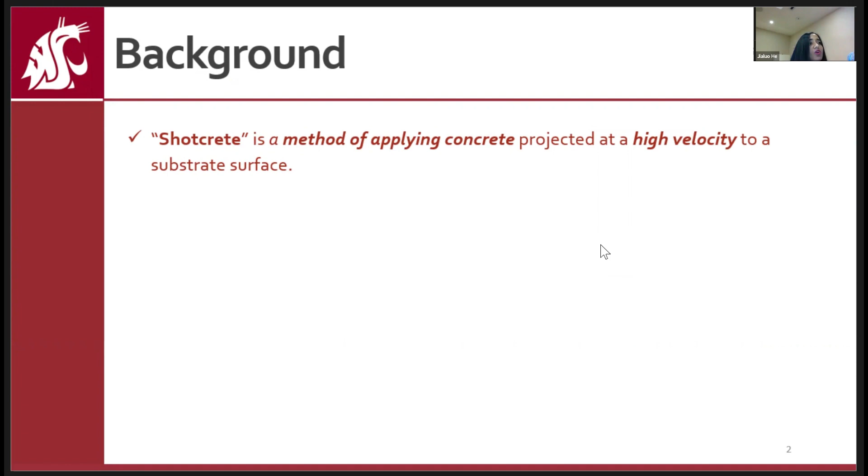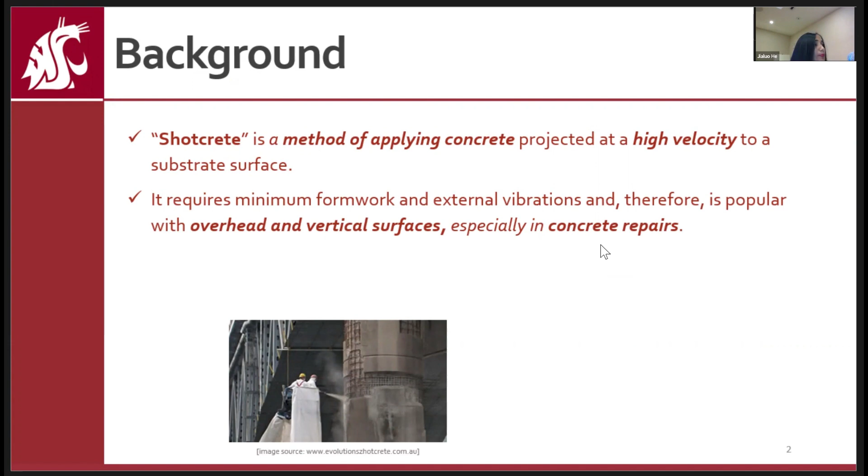So let's start. Shotcrete is nothing but concrete sprayed at a very high velocity. Due to the high impact force at the point of application, shotcrete sort of compacts itself, so it does not need any external vibrations or much formwork. Therefore, shotcrete is very popular for overhead and vertical concrete repairs, as you can see in the figure. But we now have a concrete substrate which is already hardened, and we place a fresh shotcrete layer on top of that. So there's a material mismatch between the two layers, and therefore the interface between the shotcrete and concrete is usually very weak and susceptible to damage.

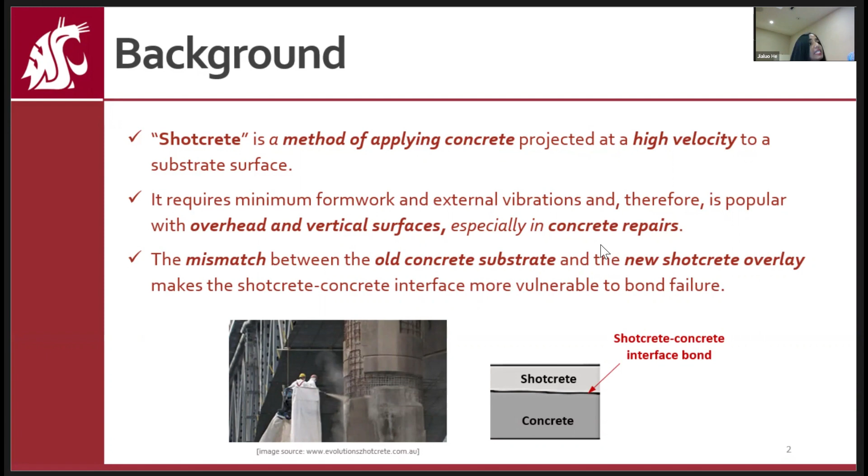So this project was focused on this interface bond. Also, there is another problem. Usually, these interface bonds are predominantly susceptible to shear type forces, but the most common test method for evaluation is based on tension loads. So that is one of the problems.

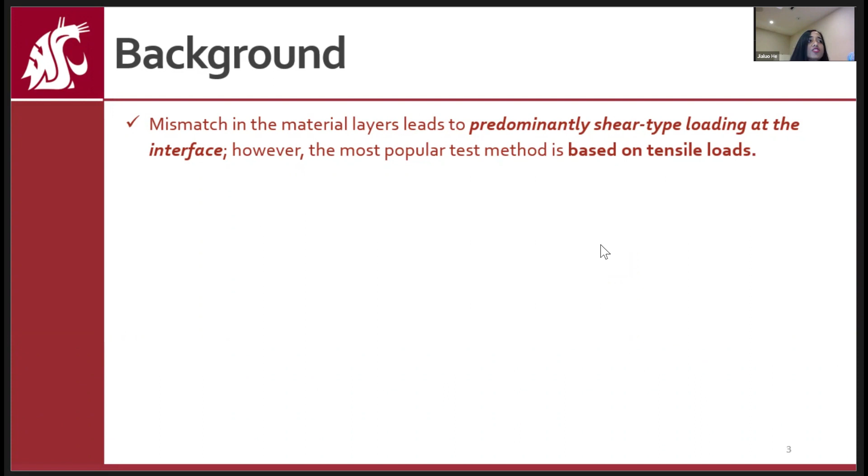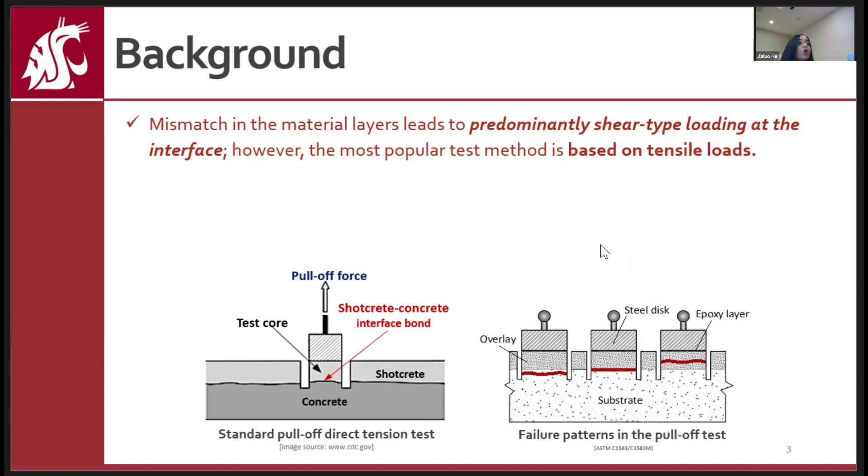The most common test method is the pull-off tension test. You have the concrete substrate, and then you have the shotcrete overlay. You drill down to the concrete substrate, and then you try to pull it off. So depending on whether the concrete to shotcrete bond is weak or strong, the failure could happen at any point - at the substrate, at the overlay, or even at the bond. So every time you measure the bond strength, you may or may not actually be measuring the bond strength. That is one of the problems with this test.

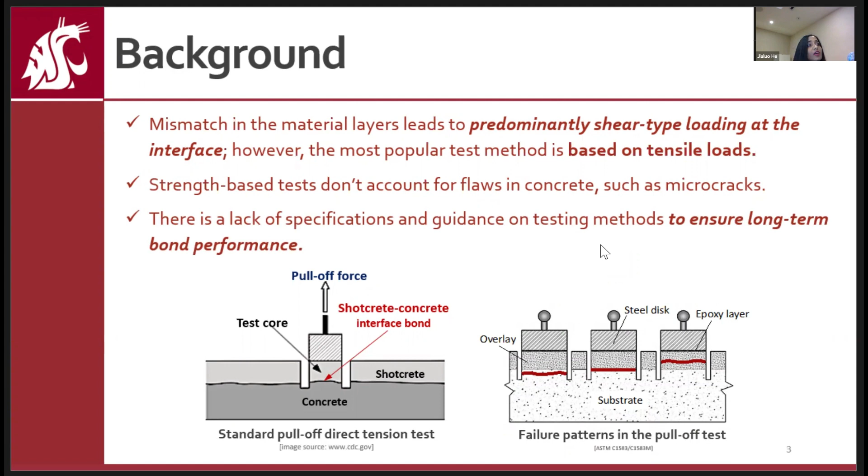Also, concrete and shotcrete are quasi-brittle materials, they have inherent flaws like microcracks, voids, etc. Those are not taken into consideration when it comes to strength-based tests, which may lead to premature failure. Furthermore, there is no standard method that takes into consideration short-term test results and predicts the service life of a structure. So that is also another problem we are trying to answer here.

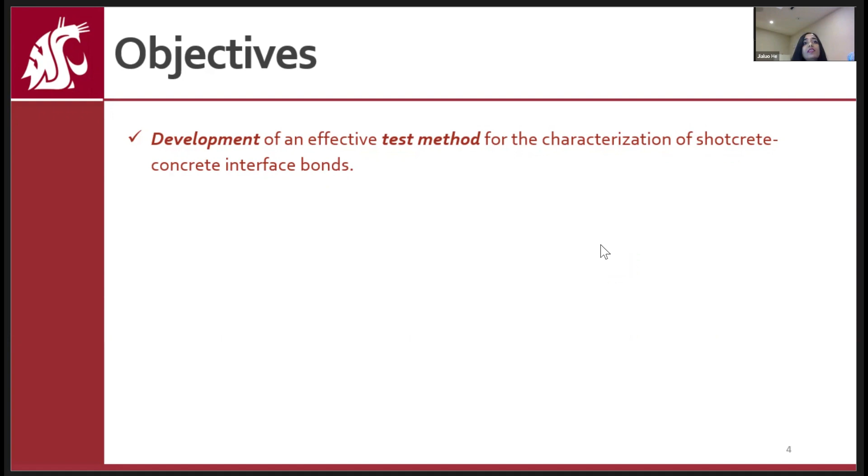So the objectives of this study, considering all these areas: first we were trying to come up with a new, more effective test method. To be precise, we came up with a fracture-based test method that considers already existing flaws in these type of composite structures. The second objective was to use this fracture-based test method to characterize the concrete-to-shotcrete interface bond. And finally, to predict its service life based on the test results.

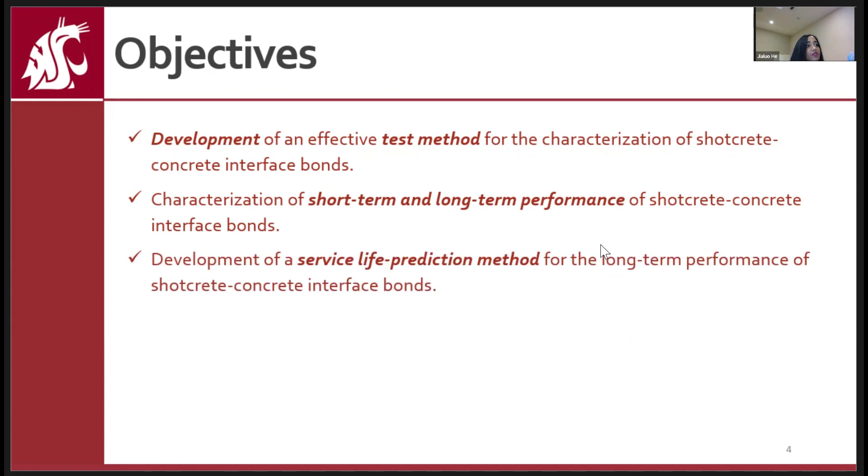So first, to develop this test method - one of the problems with the conventional pull-off test is it has a uniform cross-sectional area. It's a cylinder, so when you pull that off, it can break from anywhere. But when you have the interface area narrower, it's more likely to fail from there. So we picked something like a double wedge specimen where we tried to optimize the wedge angle to give the highest ratio of mode 2 fracture energy to total fracture energy. That was our basic concept when designing this.

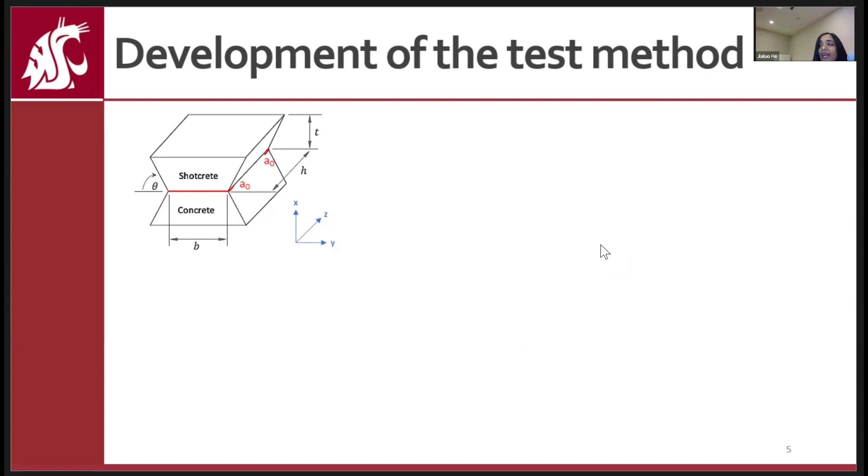This was a very compact specimen. If you have seen fracture-based tests, they're usually larger specimens, so we tried to come up with a compact specimen. Initially, we introduced two cracks as a notch. We did a finite element analysis to optimize this angle, and finally we found that the 45-degree angle was the best one. So we designed it in that way.

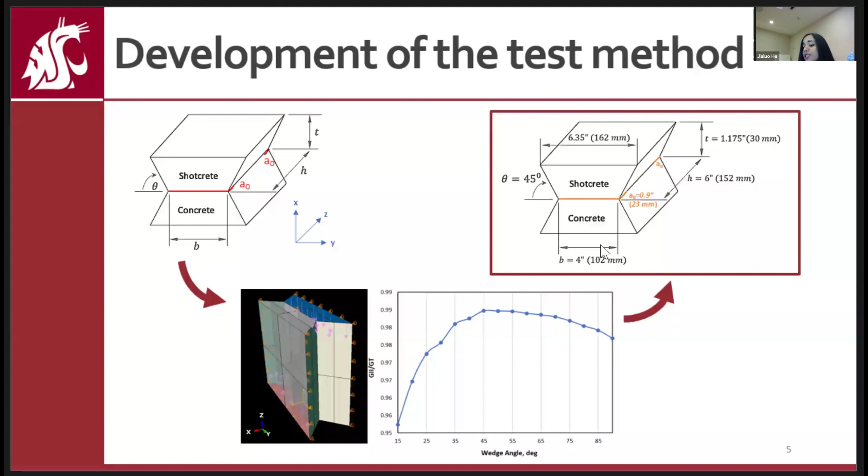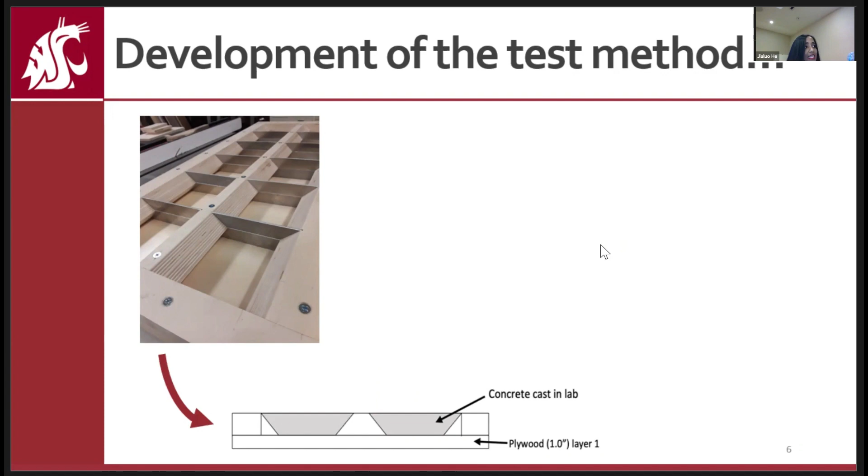Once the specimen was designed, our target was to design the mold. This mold, if you can see, has a panel of 12 specimens, so you can cast it at one go without casting specimens separately. First we cast the concrete layer at the bottom in the lab, and then we took it to a site where an ACI certified nozzleman did the shotcrete layer, because the quality of shotcreting depends on the skill of the nozzleman. That's why we took it to the industry and got it done.

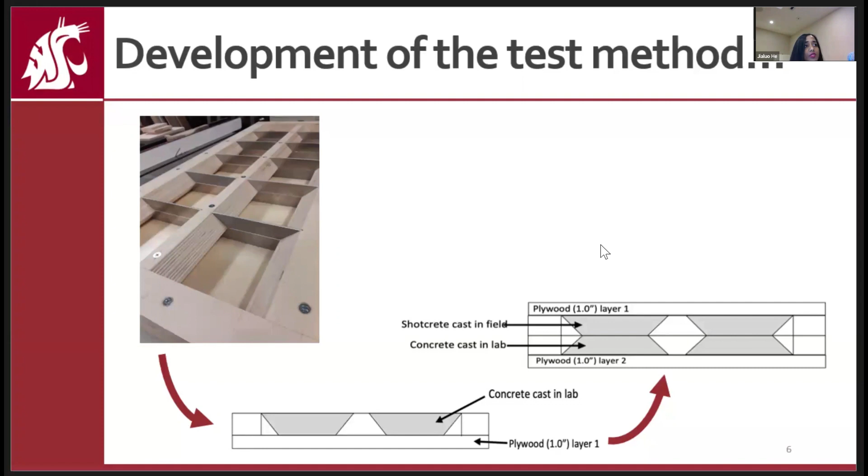One thing we usually do to improve the bond between the concrete and the shotcrete is to prepare the concrete surface before laying the shotcrete on top of that. There are different surface preparation techniques. For the characterization purpose, we chose three different techniques: one is to chip the surface, then pressure wash, then sandblast, and one control was left as cast with no preparation done.

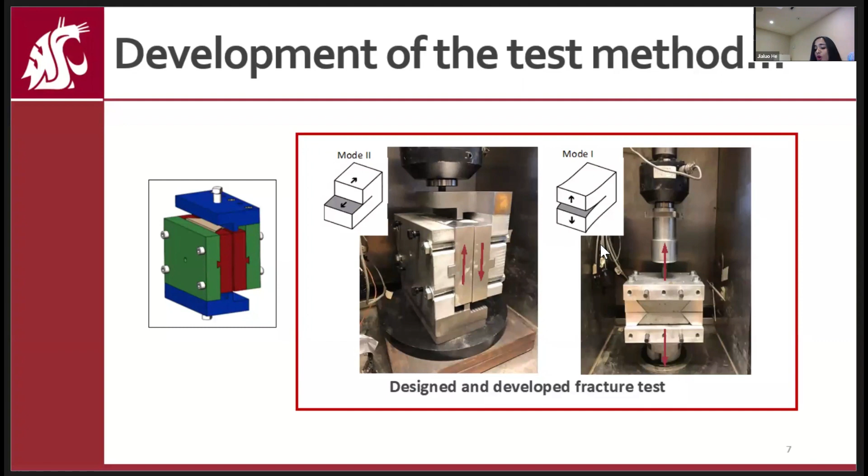Then we designed - this also took a lot of effort to design the fixture for this test because it's a new test method. One important thing I would like to mention is this fixture can do both mode 1 fracture type as well as mode 2 fracture type tests with the same specimen. That is one of its kind, because mode 1 fracture is more like a tension type load, while mode 2 fracture is more like a shear type load at the fracture. This also took a lot of effort, but I will briefly talk about it.

So then we used that specimen and the fixture to test the surface preparation techniques I mentioned before. What we found is, using fracture energy as the key characterization point, the chip samples had the most mode 2 fracture resistance to the bond.

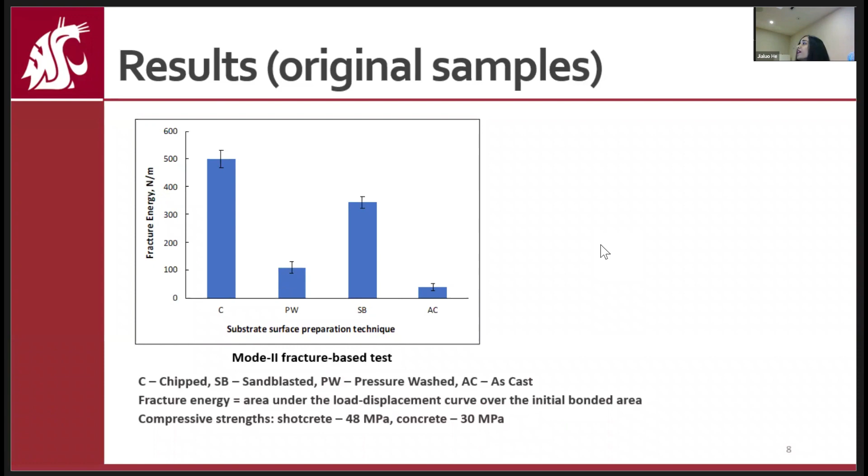So chipped, followed by sandblasting and pressure wash, and as cast was the lowest. As a comparison, we conducted tension and shear tests as well. Tension and shear tests were done on uniform cylindrical samples, whereas the double wedge specimens I introduced were used for fracture tests. We found that the shear test characterization was more closely related to the fracture-based test characterization. But if you focus on the pressure washed and sandblasted specimens, pressure washed specimens are better in tension than in shear, and sandblasted specimens are better in shear than in tension. So depending on what test method you use, your characterization may vary, and depending on your application, you might want to pick the right characterization method, or maybe a combination.

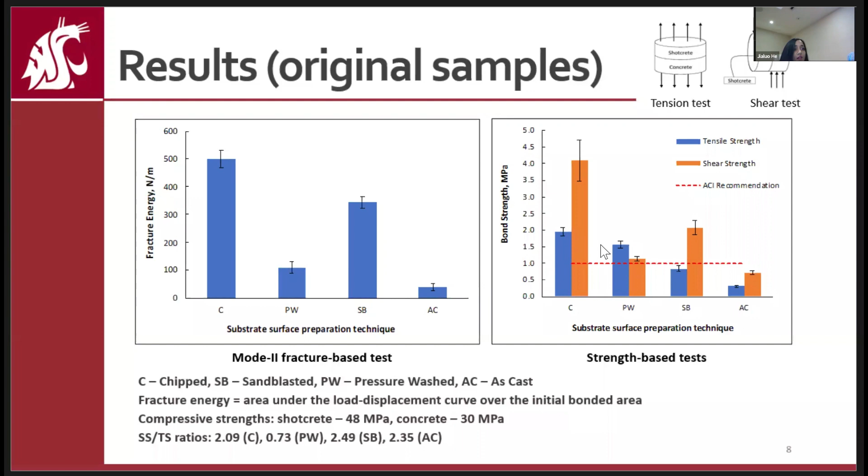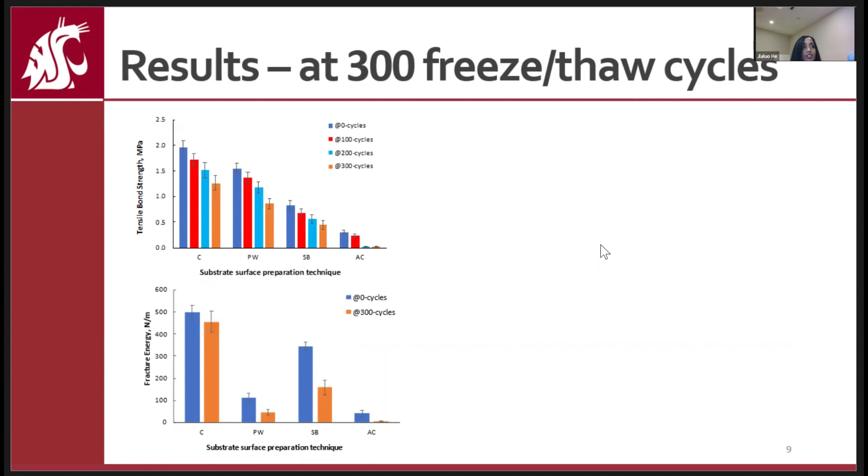We used the same tests to characterize these specimens at 300 freeze-thaw cycles through laboratory conditioning. Since tension tests and fracture energy are not directly comparable, I used the relative durability factor as a comparison method - fracture energy at 300 cycles compared to initial fracture energy, or tension strength at 300 cycles compared to initial tension strength. At 300 cycles, the fracture energy of chip samples reduced to 91% of the initial value, but the tensile strength reduced to 65% of the initial strength. The initial patterns remain the same, but the reduction shows significant changes.

Pay attention to the as-cast specimen - it has almost failed at 300 cycles. This indicates that surface preparation is important, and depending on your application, you might want to pick the right surface preparation technique.

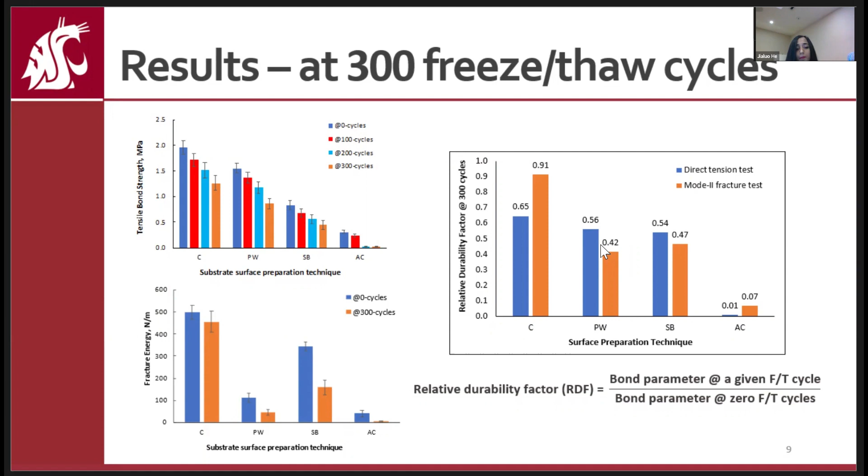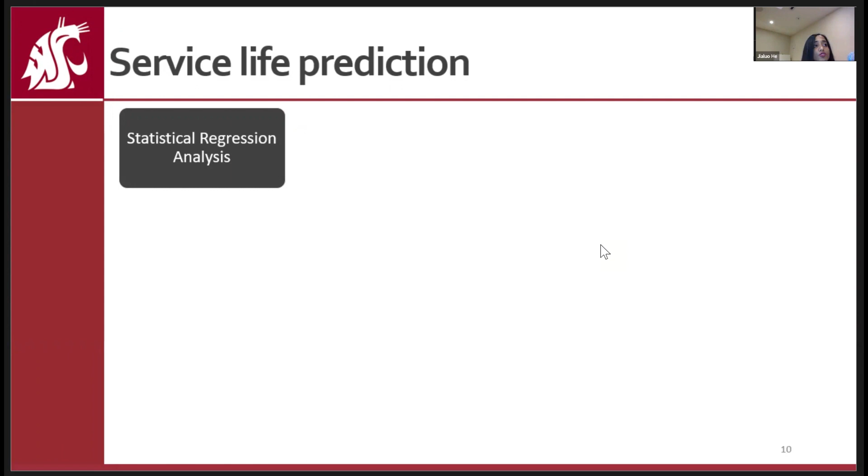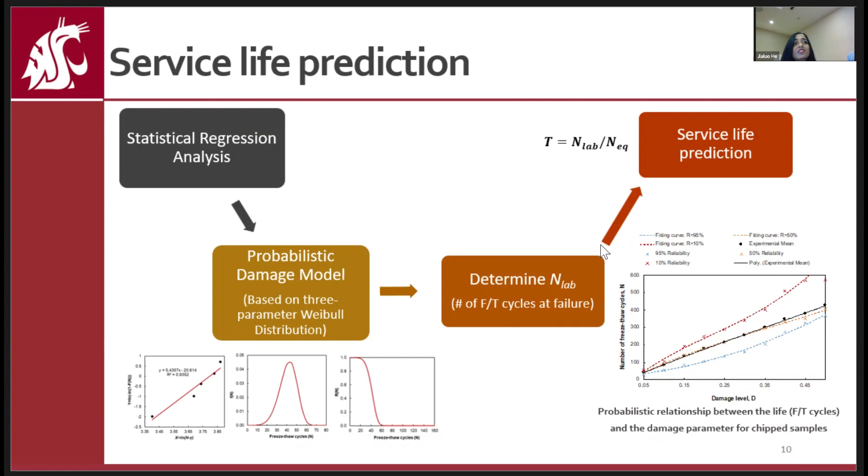Then, using the results, we tried to predict the service life of a structure - when would the structure fail? We did a statistical regression analysis followed by a 3-parameter Weibull distribution based damage model, and found at which freeze-thaw cycle the composite structure would fail. Finally, we found the number of years at which it would fail. This depends on how many freeze-thaw cycles occur per year, which depends on location. In Pullman, where it snows a lot, the number is higher compared to somewhere like Seattle.

We compared it with SeaTac and Pullman. As you can see, a chip sample that would remain for 42 years in Seattle would remain only 6.5 years in Pullman. This indicates the importance - by this time, as-cast specimens would definitely fail. It's important to provide additional mechanical bond between the concrete and the shotcrete, especially if your building location is in a freeze-thaw prone area.

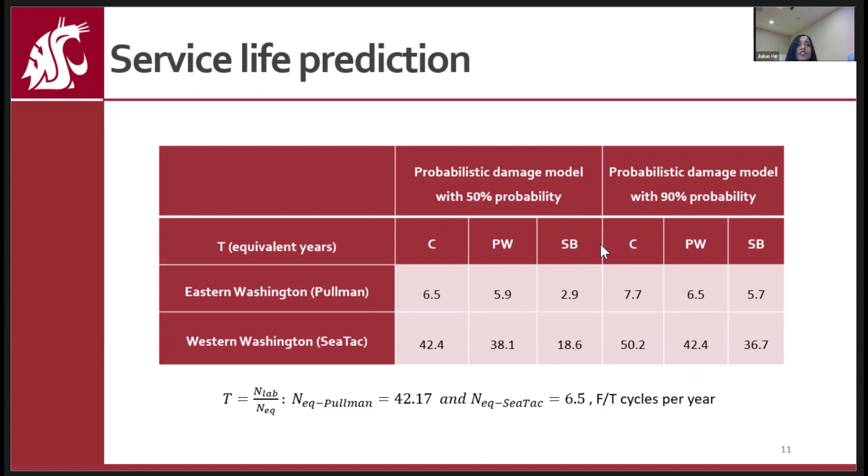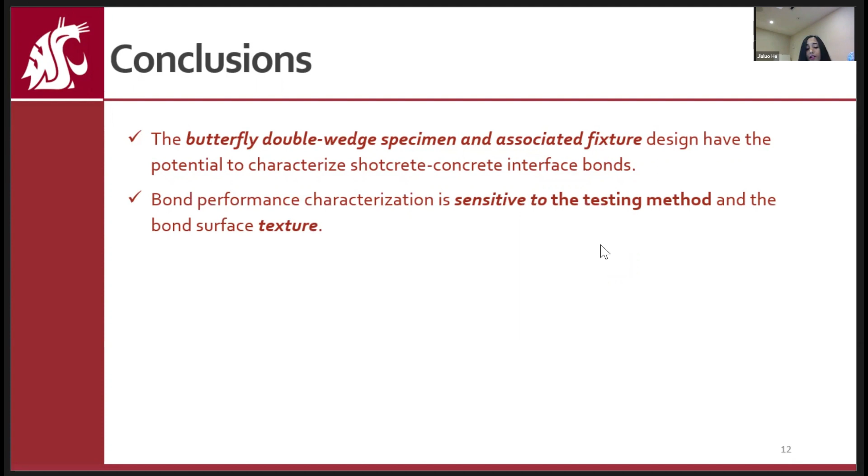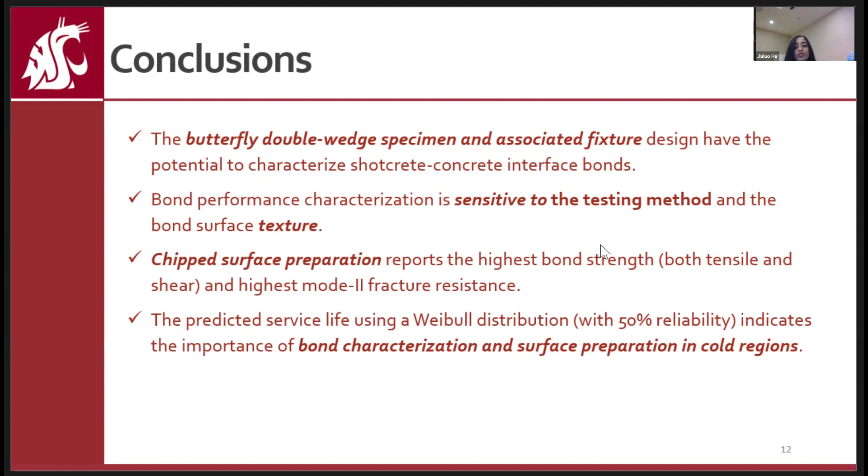Summarizing everything, we came up with this double wedge specimen and used it successfully to characterize the bond between concrete and shotcrete. We found that it is sensitive to the testing method as well as the texture of the sample. Chip surfaces were the best in both strength-based tests and fracture-based tests. Finally, we found that service life prediction models can be used to predict service life in different regions. Thank you so much, I'll be happy to answer any questions.

Very interesting presentation. I think probably for the sake of time, we didn't get the detail, but I was curious how you measure the fracture and actually measure the specimen part, because this fracture energy is size dependent. Because it's size dependent, the effect of surface roughness will change with size, so you want to measure the difference in size. You need to get to a size where you know that. So I wonder if you thought about that development.

Yes, definitely. For this one, we used the usual way of measuring fracture energy - it's the area under the force displacement curve, more like average, divided by the initial bonded area. But you are right, you need to think about how the surface roughness works. We did not go into details at this point, so maybe it could be future research, yes.